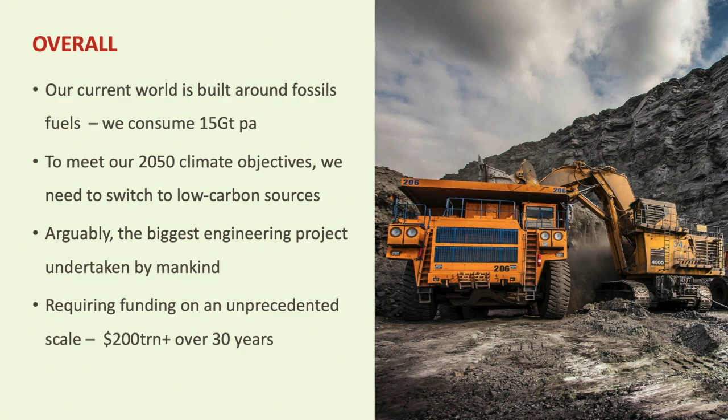Of course, to meet the climate objectives set for 2050, we need to switch to low carbon sources. What I would say to my engineering colleagues is that this is the biggest single engineering project ever attempted or undertaken by mankind. For example, it requires funding on a quite unprecedented scale. The numbers aren't terribly exact, but a figure of 200 or 250 trillion dollars has been mentioned, which is about 6 or 7% of the world GDP. That's how much we need to spend over that time period to get the result we're looking for.

So I'll say a little bit about climate change and the political response to it, about how energy flows through the system, because this subject is all about the management of energy. I'll talk about decarbonisation technologies and energy generation, transmission and usage, then some whole system issues, and finally the progress we're making and the challenges we still face.

First of all, I hope you don't mind, I tend to rattle off terms like megawatt hours and terawatt hours without thinking about it. So just a quick reminder of units of measurement. An old-fashioned torch bulb will be about 1 watt. A kilowatt would be a 1 bar electric fire, 2 kilowatts for a kettle or an iron. Kilowatt hours, running 1 kilowatt for 1 hour, is how we pay for our electricity. So we will debate the merits of 7p a kilowatt hour from Octopus versus 30p a kilowatt hour from Scottish Power, or whatever company you choose to support.

Megawatts - that is how electricity is traded in wholesale terms. 1 megawatt is equivalent to, for example, a 4-car train of the type that goes through Romsey, roughly. And the smallest wind turbines are about 2 megawatts. Then when you get to gigawatts, you're talking big stuff - a large-ish city will consume about a gigawatt of power. I don't think anyone talks about gigawatt hours, or maybe a little bit.

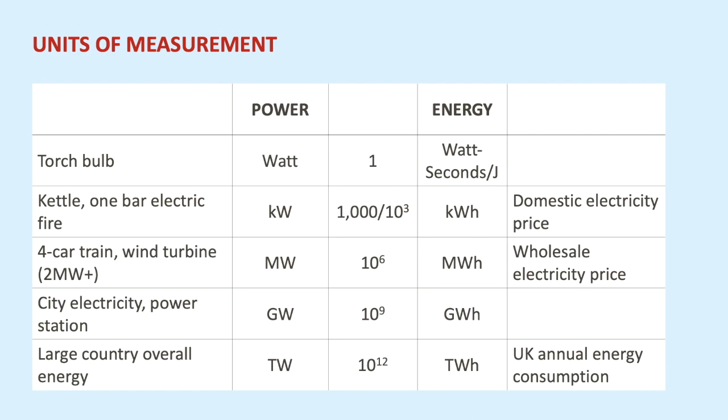And then the next one up is terawatt hours, terawatts or terawatt hours. If you're talking about the energy consumption of a country, you would express it normally in terawatt hours. So the UK, for example, gets through about 1,500 terawatt hours a year. You can work that back to how many light bulbs, how many torch bulbs that is - that's too difficult for me. So I'll probably use these units without thinking about it.

So let's say a little bit about climate change. This is a graph which shows concentration of carbon dioxide in the atmosphere for the last 800,000 years. It's taken from ice samples and whatnot. If you trace across, it oscillates up and down, typically between about 160-170 parts per million at the lowest point, up to just under 300. That was the natural cycle until about 1850. Now it's much further up the scale, and it's quite anomalous. That, in a nutshell, is the problem we're facing.

At the present moment, the atmospheric concentration is about 420 parts per million. So it's not all that much, only 0.04%. In a room of this sort, there's probably about a cubic metre of carbon dioxide, but it does have a very powerful effect. That, in a nutshell, is the issue we're dealing with.

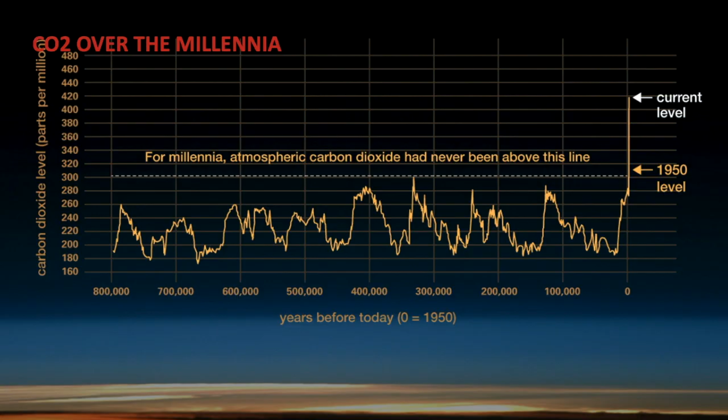To take that a bit further, I spoke earlier about the consumption of fossil fuels. This is how much greenhouse gas emission the world produces per year. So 15 billion tonnes of fossil fuel produces just over 50 billion tonnes of greenhouse gases. This is a summation of the effect of predominantly half a dozen different gases. You can see that in 1850 we weren't producing all that much, and now we're up to just over the 50 mark. If you're an optimist and look at the last 5 years, you'd say it's flattening out a bit, but it is still going up, I'm afraid.

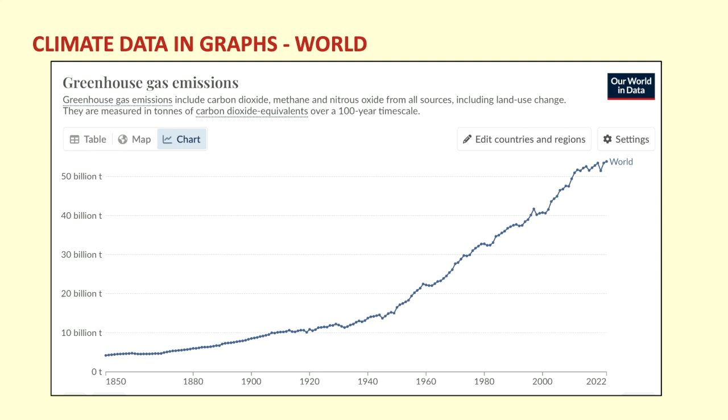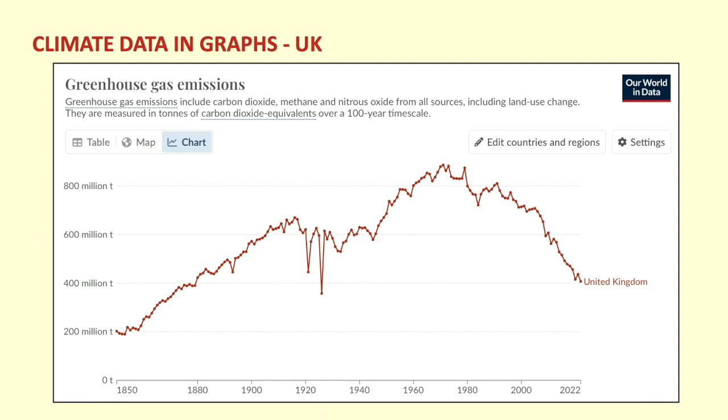In the case of the UK, and in fact most advanced countries, things have come down quite substantially. In about 1990, we as a country were producing about 800 million tonnes of greenhouse gases, and we're down around the 400 million mark now. So our emissions have gone down quite substantially, and the trend is continuing downwards. These are measured, by the way, in carbon dioxide equivalents.

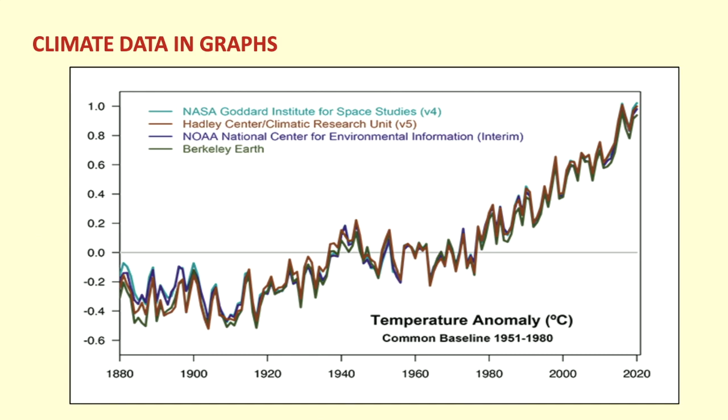And the climate effect - this graph shows you from 1880 through to 2020. You can see the shape of the graph, it zigzags up and down a little bit. But in broad terms, we're about 1.4, 1.5 degrees C warmer than we were in pre-industrial times.

In terms of what is a greenhouse gas, basically there are 6 defined in the greenhouse gas protocol: carbon dioxide, methane, nitrous oxide, and 3 other fluorinated hydrocarbons. These are aggregated - they all have slightly different effects and different residence times within the atmosphere. They're all aggregated up to, I think, 100-year CO2 equivalents. So the figures are a bit of an approximation, but you can see the general effect.

One thing you might find interesting is that this subject of the effect of carbon dioxide on temperatures shouldn't come as a surprise to us. I've got a copy of a paper published in April 1896 by the Swedish scientist Svante Arrhenius, called 'On the Influence of Carbonic Acid in the Air Upon the Temperature of the Ground.' In those days they talked about carbonic acid rather than carbon dioxide. He gave a surprisingly accurate estimate of the way things were going, what the effect would be - in his calculation, he thought it would have an effect of about 3 or 4 degrees. So that is what was predicted 130 years ago, in approximate terms.

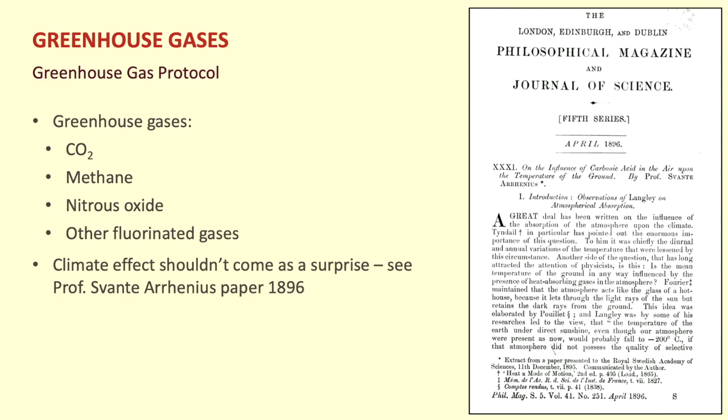In political terms, this whole system is overseen by the United Nations Framework Convention on Climate Change, which is actually a legally binding treaty, with origins in 1997 in Kyoto. There are annual meetings called COPs, Conference of the Parties. The real breakthrough came at COP21 in Paris in 2015, where everyone committed to trying to limit the temperature rise to 1.5 degrees, but sort of accepting 2. Then in Glasgow in 2021, at COP26, the Paris stuff was written into what's called the Paris Agreement Rulebook. I actually went to that conference since it was in Glasgow, which was quite interesting. The shorthand term used is net zero, which isn't one I particularly favour, but it is easy to use. What the United Nations says about net zero is that, put simply, it means cutting greenhouse gas emissions to as close to zero as possible, with any remaining emissions reabsorbed from the atmosphere by oceans and forests, for instance.

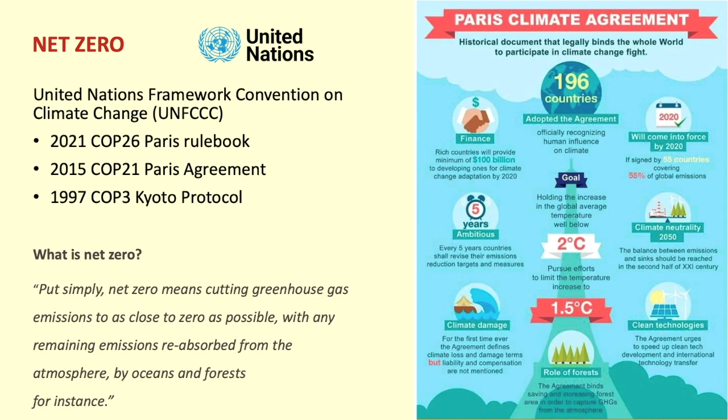So that's the political background to what's going on. In terms of where those gases come from or go to, this is a plot of the greenhouse gas emissions in 2019, so it's a bit out of date. At that time, 30% came from coal, used predominantly in coal-fired power plants, but also in blast furnaces, chemical processes, and other industrial processes. So coal was quite a big component, and it hasn't changed that radically.

Gas was producing about 14% of the world's energy - again, gas-fired power plants, building heating, and other industrial uses. Oil, about a quarter, 25%, mainly for transport - cars, aircraft, ocean freight, and road freight - but also for various industrial uses in building heating and fuel for agriculture.

And then this is when you get into slightly more surprising things. About 17% of the carbon dioxide was coming from land use - first of all, net deforestation, so taking trees out, enteric fermentation of cattle, sheep and so on, nitrous oxide emissions from the production of nitrogen for fertilizers, and rice and manure. So there's quite a big component from the way that we use land.

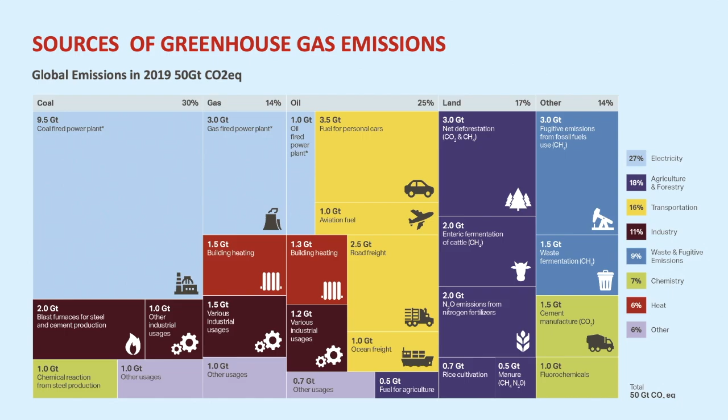Just to summarize the UK - this is the energy that we consumed in the UK in 2023. Over the course of the year, we were consuming energy at a rate of 180 gigawatts at any one time, of which 35 is electricity. I think it sometimes comes as a surprise to people to find that only about 20% of our energy usage actually flows through electricity. Most of the rest comes either from natural gas or from oil - natural gas is the blue on there, and the oil is the orange bit.

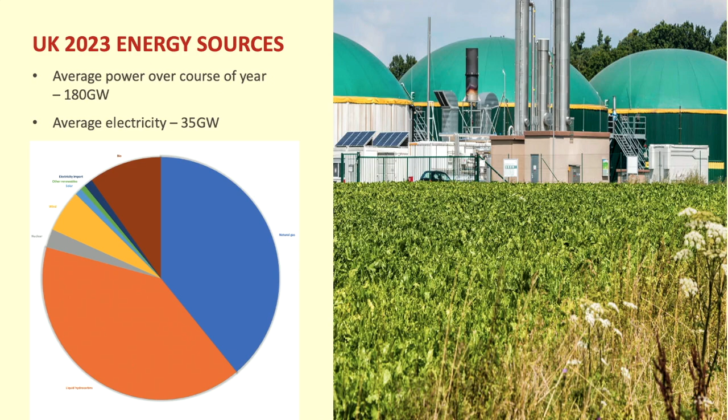So that's the way that we use energy. There is a big concentration on electricity, whereas other things like oil and gas do need at least equal attention.

Again, this is the same thing shown in a different way. On the left-hand side are the different sources of energy, measured in terawatt-hours, my favourite unit - natural gas, nuclear, offshore wind, onshore wind, solar, other renewables, biosources, and liquid fuels. That's the sources coming in, and it flows across. This is known as a Sankey diagram, by the way - I didn't know that until fairly recently, but it's a pictorial way of describing what happens. And by the way, Sankey was a former president of the IMechE - something I didn't know, so I hope you're impressed.

And on the right-hand side are the points of consumption - residential, industrial, commercial, road and rail, electricity, aviation, and losses. If you just look at the colours, the shape and size, natural gas is blue, electricity is red, and oil is grey. And those are the actual figures for 2023.

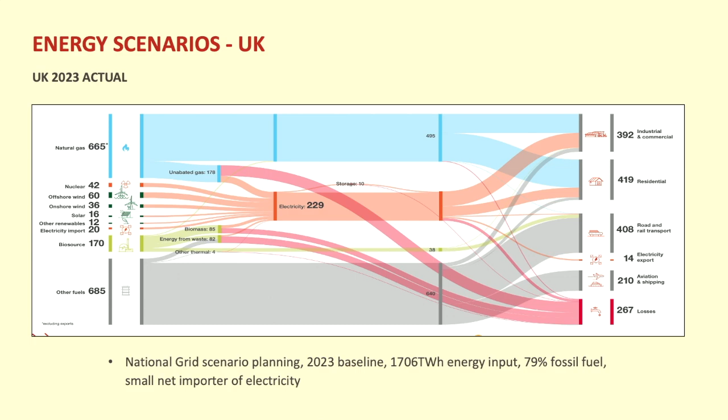This is a projection for the UK for 2050. These scenarios are put together by the National Grid on an annual basis. You can see on the left-hand side, natural gas has gone down to very little. Most of it is coming from nuclear, wind, solar, other renewables, biosource, and there's a bit at the bottom which is residual oil. Then most of it flows across, delivered through electricity, some potentially via hydrogen, into the same uses as I mentioned before. So that's the approximate shape and size of what it could look like in 25 years' time.

The other thing which doesn't appear on a graph like this is that there is an assumption that our energy consumption will reduce by about a quarter. So that's built in, and that's the assumption. Yes.

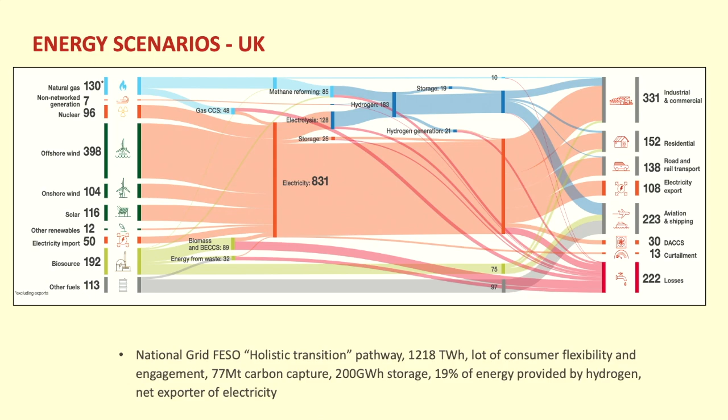In terms of the technologies that are available to us, there's quite a lot, and they're quite well developed. Obviously, reduction of energy consumption, by whatever means, is vital. And actually, in the UK, we have made a surprising amount of progress with things like gas boilers and automotive efficiency and aircraft efficiency over the last 30 or 40 years. And in my career, if there's been one continuous theme, it has been energy efficiency.

I didn't realise it at the time, but that was very much a driving force behind a lot of the things that I've been involved in personally.

Then the other technologies are the generation of energy by renewable means, electrification, the potential use of synthetic or bio-liquid fuels, new methods of producing steel and cement. There's the possibility of using gaseous fuels like hydrogen or even ammonia, and then finally carbon capture and storage. So those are the technologies which to a greater or lesser extent will get employed over the next 25 years and are being employed now.

So in terms of, and again I'm talking about the UK here, if you look at the plans that are laid out for the UK, they envisage increasing wind and solar capacity by somewhere between a factor of 5 and 8. So we seem to see a lot of wind turbines, but that's nothing compared with what's needed.

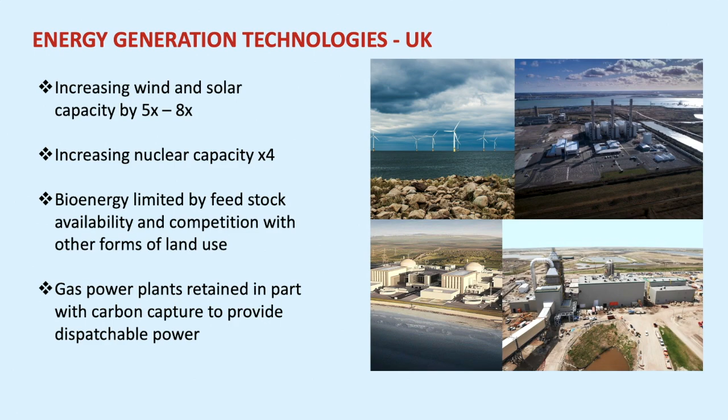And you need something you can switch on to do that. In terms of current technology, gas-powered power stations are the only real way of doing that. So although the politicians wriggle a little bit, I think it's unlikely that in the medium term we won't be able to use gas power plants.

In terms of transmission, the electricity grid will be required to transmit at least double the energy and over much longer distances. The map at the top shows some of the offshore wind farm connections. The way that electricity is generated at the moment is done quite locally. So, for example, the power plant at Marchwood is on the fringes of Southampton, so its electricity is going to Southampton, and it's not coming from the Shetland Islands or somewhere like that.

So there's a big change which is attracting more and more attention about the electricity grid, and also interconnectors between the UK and other countries. The bottom map shows the connectors that we have between ourselves and Norway, Denmark, Belgium, Holland, Ireland and France. And those are used quite extensively on a daily basis, with current flowing in both directions.

Then there is the possibility of producing liquid hydrocarbon fuels as substitutes for normal petroleum, either from biomaterial or synthetically, rather than from fossil sources. The aviation industry, for example, is very much hanging its hat on what's called sustainable aviation fuels. You may see this term SAF bandied about. It is also probable that liquid fuels will continue to be needed for heavy duty transportation and for shipping and so on. But the costs of producing it, although it's technically feasible and there are plenty of examples of it, it is very expensive to produce.

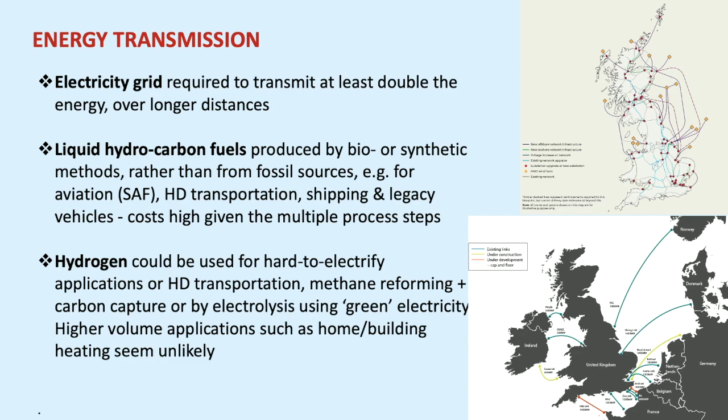So hydrogen is spoken about quite a lot. I think it sounds quite attractive somehow, doesn't it? It sounds as though an easy solution - you just stick it down the same pipes and so on. But I think it's a bit unlikely, particularly for home heating and things of that sort. But those are the means by which you can transmit energy.

And then in terms of energy usage technology, well, we already know that passenger cars are doing quite well in terms of battery power and so on, and it seems to have become almost the de facto solution. For other forms of transport, I did work in the commercial vehicle industry for quite a while for Leyland Trucks, and one of the interesting things for me is that I've noticed that other than the very heavy duty trucks, batteries are actually making quite good progress when it comes to commercial transport.

It is possible to use hydrogen fuel cells, and there are all sorts of other ways of powering heavy-duty vehicles. There are 2 or 3 experimental stretches of motorways fitted with pantographs, so that vehicles can actually pick up electricity as they go along. There's an example in Sweden and a couple in Germany, or vice versa.

Housing, commercial buildings and infrastructure are a big area, a big unknown. They account for somewhere between 25 and 40% of total energy usage, split fairly evenly between the actual running of buildings and their construction. So in that instance, there's a fine balance to be struck between how much new you do, what you do with old buildings, and retrofitting is a big subject that needs progress.

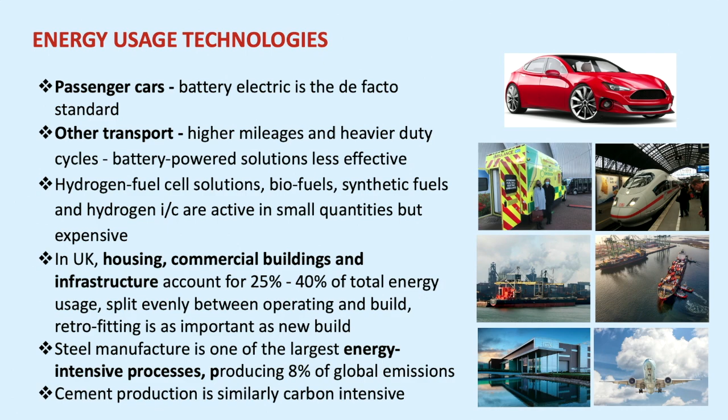There are companies where you can actually buy carbon removal, but the price per ton is enormous. What I should have said actually is I should have prefaced this by saying that carbon capture and storage on power plants, cement plants, and to a lesser extent steel plants is quite a well-developed technology, and I think it'll play quite a big part, certainly over the next 30 or 40 years.

At the moment, the world has about 50 million tons of capacity for carbon removal and injection into old oil wells. If you look at the projects in the pipeline at present, that capacity is going to grow to somewhere between 300 and 500 million tons by 2030 or thereabouts. At that point, it starts to make quite a significant impact.

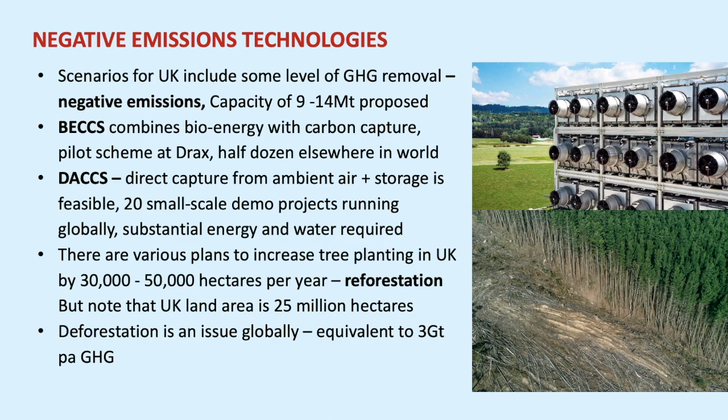And then there is a series of what I describe as whole system issues. One of the biggest, and one that attracts a lot of attention, is the variability of a lot of renewable energy sources - so, if the sun doesn't shine or the wind doesn't blow, etc.

Storage is quite a big issue. Within the UK we have 2 or 3 quite significant storage systems in Wales and Scotland, which provide about 2 gigawatts of power, and it's quite an efficient process - pumping water up and down again, you don't lose a lot of energy in the process. There's about 2 gigawatts there, but the general reckoning is that you need about 20 to 25 gigawatts to balance out the variability of renewable sources.

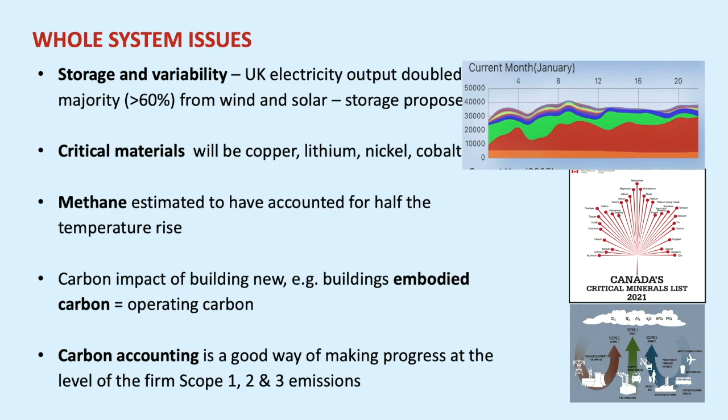My impression is that the companies most interested are the ones who can actually manage things. If you're a gas producing company, it's a bit tricky - there's not much you can do about it. But it is a helpful way forward, and it's quite a rigorous way of doing it. So I think it's quite an important point.

Then let's talk about economics. The world operates largely on free market principles. History shows that people will buy new technologies when they're affordable and useful, when they cross that affordability threshold. Governments have also consistently found that they can't buck the market, as Margaret Thatcher once said, and that's very true.

As I said before, huge investment is needed to make the changeover. But most of the technologies already exist, just not at the scale that we require - either in terms of the installed base, whether solar power or wind turbines, or in terms of the manufacturing capacity to produce those things. I think most estimates suggest we're running at about a third to a half the level we need to achieve the 2050 objectives.

One of the things I see in some of the things I'm involved in is that, first of all, there isn't actually a shortage of money - there's plenty of cash in the world. What we tend to be short of is good investments. A lot of that money is ours - it's our pension schemes and so on - and people don't really like it if their pension disappears because it's been put in an unwise investment. A lot of the investment houses have quite conservative, with a small c, investment criteria.

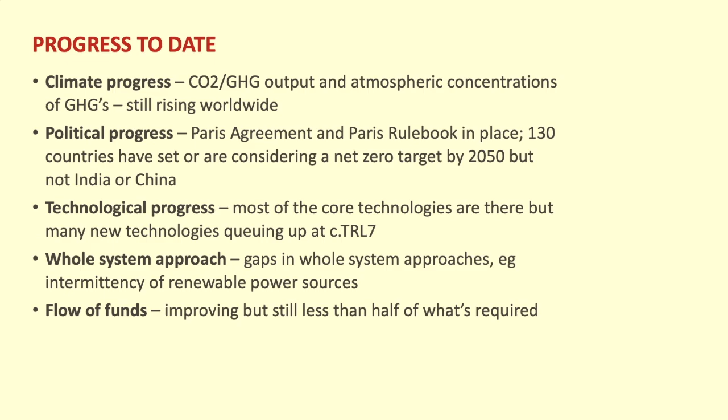Technology-wise, most of the building blocks are there, but there are also quite a lot of other technologies which are queuing up. I don't know how many of you are familiar with technology readiness levels, but this is a system for categorizing the maturity of new technologies. There's quite a lot of technology at TRL 6 and 7, just before industrialization. Then on the whole system approach, there are gaps, and I don't think we're addressing adequately the intermittency of renewable power sources. And the flow of funds is about half of what's required.

These are the 7 challenges which I suggested that our institution and other institutions might like to turn their attention to. Intermittency, intelligent grid - the grids like electricity grids like ours were set up in a way where there were tens or maybe low hundreds of power sources and millions of consumers. And of course what we have now is millions of producers as well. So the intelligence and the two-way flows in the grid take quite a bit of effort.

Then there is the role and the scale of hydrogen - what role will it really play? There's the supplies and the availability and the geopolitics of critical materials. Carbon capture and utilisation, heating and retrofitting buildings, and the financing role played by governments.

To the credit of the institutions, you will find papers, I think, on all these subjects if you look hard enough, with the possible exception of the last one, which I'm doing some work on with some people at the moment. So watch this space. So those are the challenges that I believe we face.

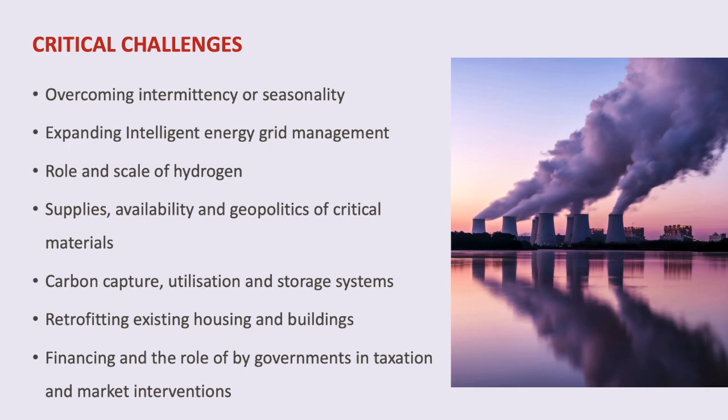So where are we? Well, we've got 25 years to switch from fossil fuel to renewable energy sources, and I do think the political, financial, commercial, and engineering world need to work together much more closely on this. It's one of the things I say to engineers - it's a route which is full of contradictions and ambiguities and uncertainties, which most engineers don't thank me for saying.

You know, certainty is the watchword of our trade, if you like. And there are non-optimal solutions - things we can't get 100% right 100% of the time, as it were. But having said that, success in overcoming climate change, I think, will be an immense contribution from engineering to society.